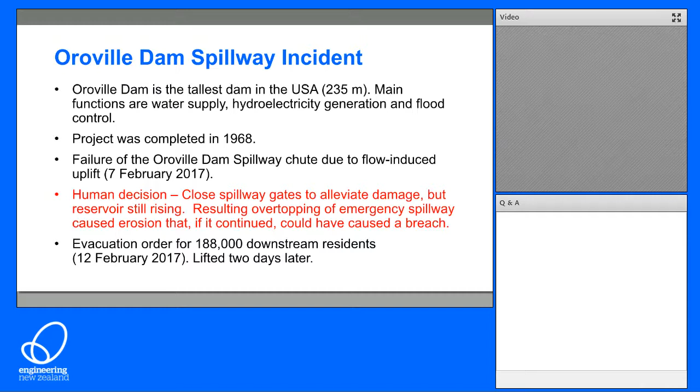For those of you that don't know, Oroville Dam is the tallest dam in the USA with a maximum height of approximately 235 meters. Its main functions are water supply, hydroelectric generation, and flood control. The project was completed in 1968. So at the time of the incident, which was 2017, it was nearly 50 years old. The incident that we will talk about today is the failure of the chute of the Oroville Dam main spillway due to excessive uplift induced by the flow. And it happened on February 7, 2017.

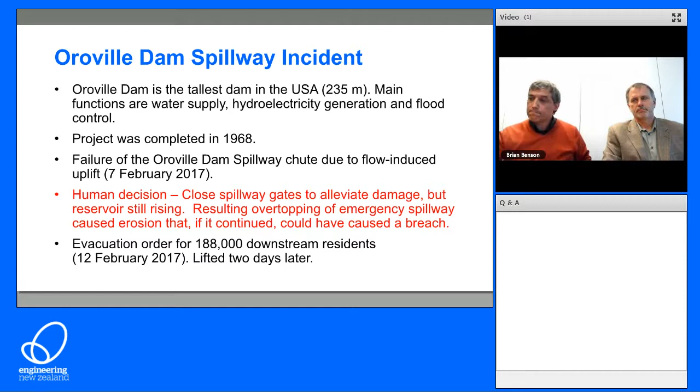Today, we have decided to emphasize some of the human factors that led to the incident. In particular, we are going to be talking about the decision to close the spillway gates after the chute failed, which is what led to a critical situation that on February 12 led to an evacuation order for almost 190,000 people that were living downstream of the dam. Thankfully, this order was lifted 2 days later and no uncontrolled release of the reservoir took place. So, just 1 second.

Yeah, just briefly, I want to touch on why we think that it's an interesting case for all civil engineers. Well, first of all, many spillways built before and even after Oroville were built sharing many of its design features that led to the chute failure. So this incident is leading to a revision of the safety of many spillways around the world. Oroville has also contributed to a shift in how we conduct safety reviews, since we will see that one of the main lessons is the need to focus on an analysis of the structure with respect to current practice and first principles, instead of simply basing our opinion on past performance trends.

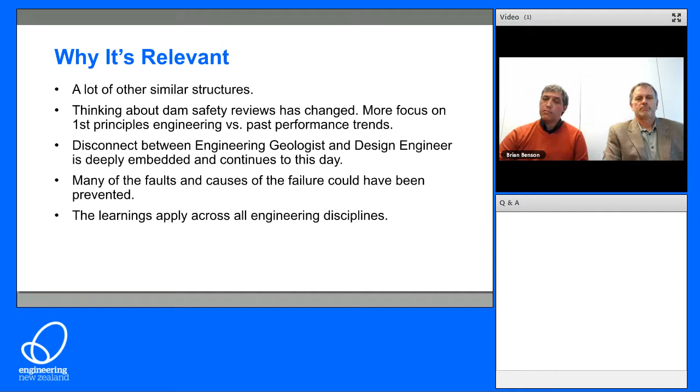We also believe that Oroville is a good example of the age-old disconnect that many times occurs even today between geologists and engineering geologists and design engineers. Finally, many of the problems and mistakes that took place in Oroville could have been prevented, and many are rooted in human failure, as I said earlier. So the lessons from this incident are applicable to all engineering disciplines, especially when it comes to complex projects like Oroville Dam.

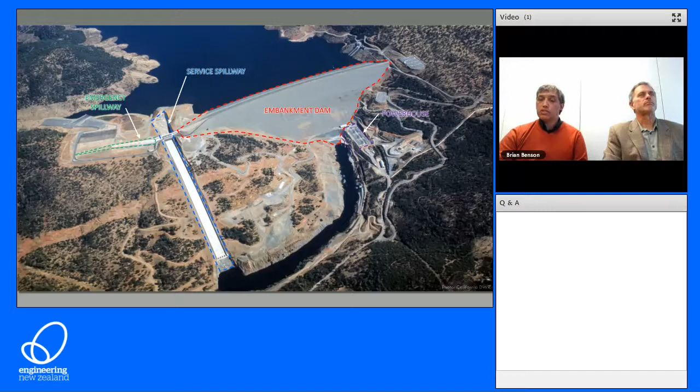So this is a bird's eye view of Oroville Dam, and I have marked the main structures that we are going to be discussing today. The embankment dam is in red, and the powerhouse is at the foot of the dam. The main service spillway that failed is separate from the main dam, and it's on the right abutment. And this is the emergency spillway that had never operated in the 50-year history of the dam.

So before we start talking about what happened, I wanted to mention that most of what we're going to be discussing today is based on the report by the independent forensic team that was convened to determine the causes of the incident. This was a requirement by the Federal Energy Regulatory Commission to the owner of the dam, which is the California Department of Water Resources, or DWR. It's a very good document and one of the main references on this incident, and we will mention it again later.

As an initial comment, the service spillway chute was founded on rock of varying quality, and in particular, it crossed an area of very weathered rock and residual soils. And even though this was clearly recognized by the geologists during construction and accurately mapped, the engineers did not alter the design of the chute that assumed good rock.

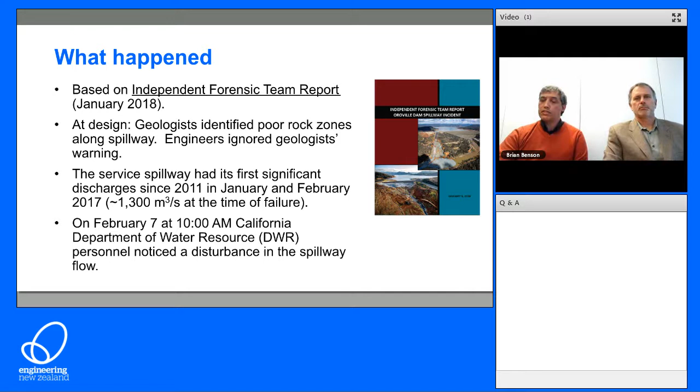In January and February of 2017, the spillway had its first significant discharges in almost 6 years. When the chute failed, the spillway was discharging approximately 1,300 cubic meters per second. However, in the morning of February 7, DWR staff that was monitoring the dam noticed a disturbance in the spillway flow. After closing the gates, they noticed that an entire section of the chute slabs was missing. The slabs had been lifted or undermined by the flow, and erosion of the foundation beneath the slabs had started.

The independent forensic team determined that the most likely cause of the failure was uplift due to stagnation pressures forming on an offset into the flow on the spillway surface. This is a process where water is injected into the drainage system through open joints or cracks in the slabs, and the Oroville spillway chute was particularly susceptible to this failure mechanism due to the fact that cracks had formed along the entire chute aligned with the drainage system pipes since the time of construction due to a failure in the design that we are going to mention later on.

In the following days, the DWR opened the gate several times to test the progress of the damage, since they had hydrological models that predicted increasing inflow into Lake Oroville, and they expected that they were going to need to operate the service spillway. When they operated the spillway, erosion progressed, but did not really continue upstream to affect the upper chute. However, there were two potential problems that threatened the operation of the dam.

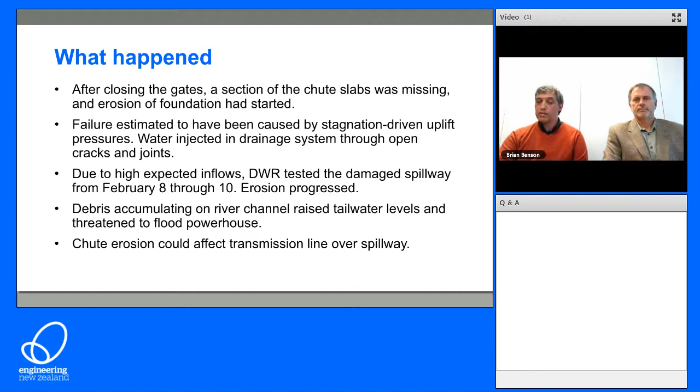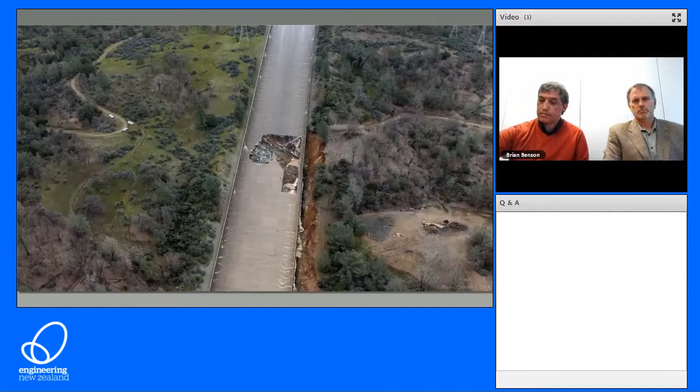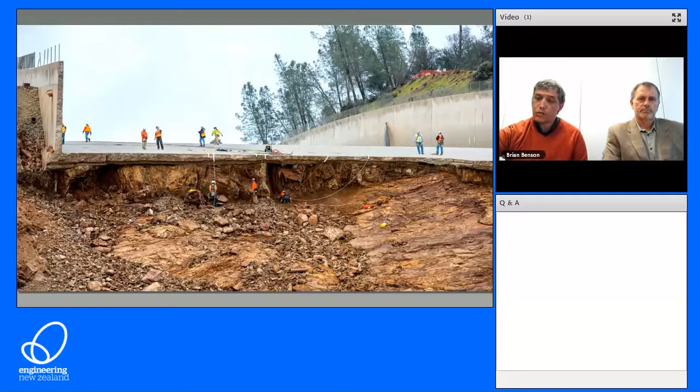So continuing the tale, as rain continued and the reservoir rose, the moment that I mentioned came to happen. The people in charge of the emergency had to decide between two courses of action: opening the gates of the service spillway and lowering the reservoir, perhaps flooding the powerhouse or destroying the transmission tower, or closing them and letting the lake level rise. This would cause water to flow over the emergency spillway, which, as I mentioned, had never been used before.

The emergency spillway is a concrete weir that discharges onto the natural hillside. It was never lined in concrete because the opinion of the engineers reviewing the dam since the time of construction was that the rock was sound and no significant erosion was going to take place, even if the emergency spillway had to operate. However, in view of what had happened to the service spillway, and having very quickly reviewed all the available information on the geotechnical characteristics of the rock in the area, there was a strong recommendation from the civil and geotechnical engineers not to use the emergency spillway.

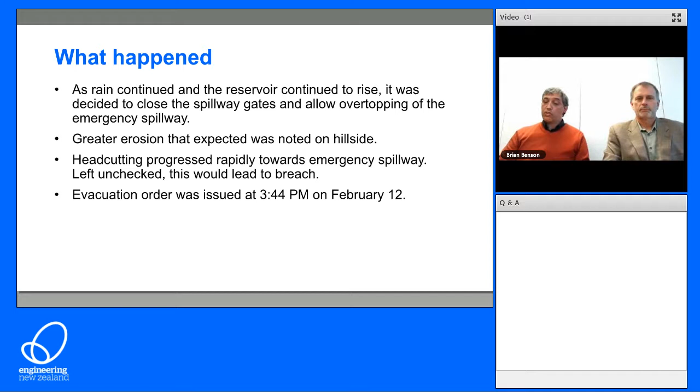Unfortunately, operational concerns ruled the day and the emergency spillway started to spill. Very quickly, the erosion was very significant and started to progress towards the weir. If the weir was undermined and it fell, it could cause the uncontrolled release of part, not the total, but part of the reservoir volume down to the emergency spillway foundation level. With the head cutting approaching the foundation of the emergency spillway, the evacuation order was finally issued in the afternoon of February 12th.

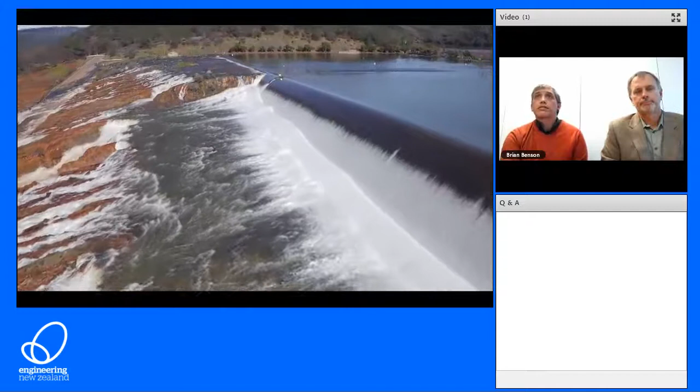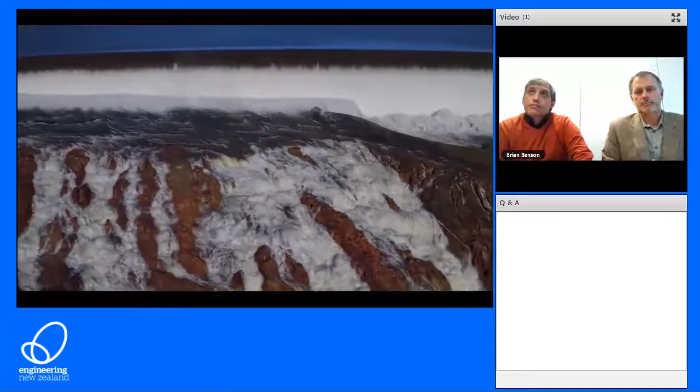Later that same day, you can see the erosion progressing towards the emergency spillway. That was a critical situation that led to the evacuation order. You can see how close it got to the foundation. So there's no apron or no dissipation structure at the foot of the emergency spillway.

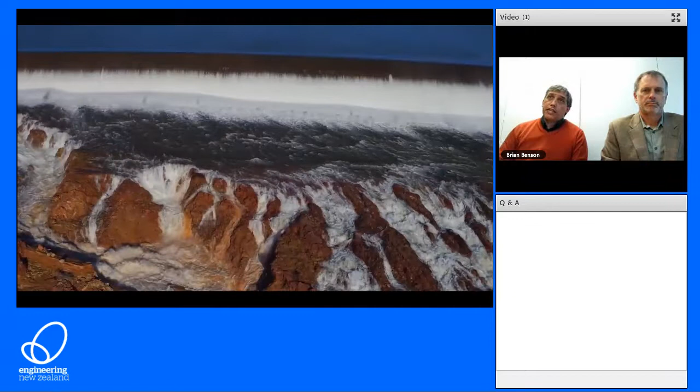After this situation took place, the service spillway gates were open, and the entire time until the flood passed, the lake level was lowered and the emergency spillway stopped operating. And thankfully, the erosion in the service spillway did not progress upstream towards the gates. So the emergency passed, and 2 days later, the evacuation order was lifted.

So these are some of the main mistakes that we decided were worth emphasizing today. First of all, it is worth noting that the design did not meet the best practices of its time and was not adjusted, as I mentioned, to the real site conditions found during construction.

Current chute slabs incorporate a series of design details, especially when they're founded on poor foundation, like in this case, that serve as defensive features to prevent this type of failure. And some of them are water stops, shear keys, reinforcement crossing the joints, and some other. And some of these were not in the Oroville chute design. For instance, it didn't have water stops.

Since construction, there have been many inspections and safety reviews, and yet these vulnerabilities had not been recognized. The foundation rock was in general estimated to be of very good quality, and erosion was not expected to be significant, even in the unlikely case of a situation like the one that took place. Many vulnerabilities now recognized in the design and many signs of anomalous behavior have been normalized through the years.

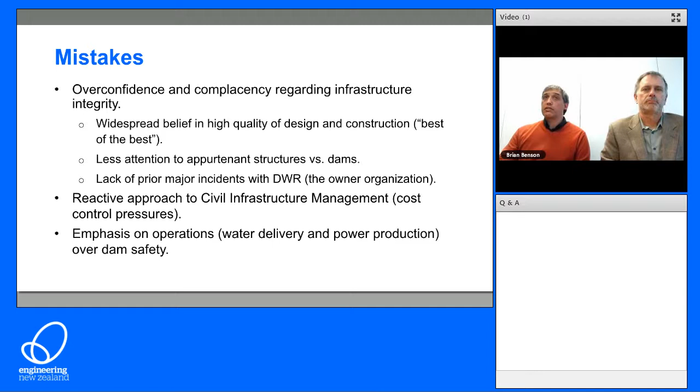Also, as commonly happens in many dams, many times operational concerns such as water delivery or power production reign over dam safety issues. And finally, the forensic team believed that the dam owner relied heavily on regulators, consultants, and the regulatory processes. Typical safety reviews that follow the standards set by regulators might not be enough to successfully address the safety needs of critical infrastructure like Oroville Dam.

An interesting point is that they also observed that poor information management could have contributed to the fact that several review teams didn't recognize the significant hazard to the spillway chute, because relevant information was not easy to access, in particular documents from the original design and construction, and this is also very commonly found in old dams.

Another comment from the forensic team was the generally insufficient technical expertise in dam engineering and dam safety of the DWR staff, and even in some of the external consultants in charge of reviews. One point that I found very interesting was that they mentioned that they did not find records of a specialist in spillway design in particular having reviewed the service spillway during the entire 50-year period since construction.

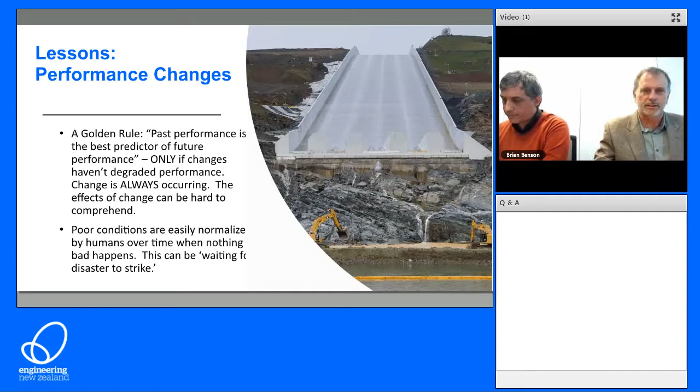And this second one on this slide relates to what David touched on, but is really worth emphasizing: there's this human tendency to normalize past behavior, even though it may be abnormal relative to what we consider good performance. And this, I say here, can be waiting for disaster to strike. There's this incident with the condominium in Florida still ongoing at the moment, the rescue and recovery, but no doubt there'll be another forensic investigation of that. We don't know what they're going to say, but I have a sense we'll see some relation to this human factor in that instance as well.